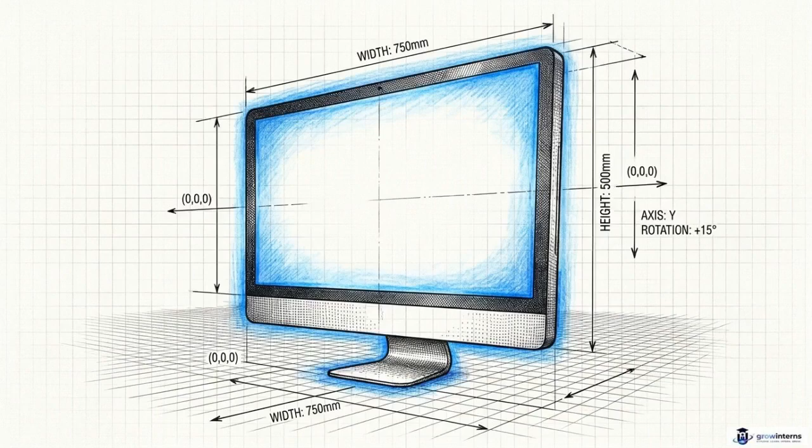When you open AutoCAD for the very first time, you are greeted by an intimidating, infinite, dark void. But as that grid locks into place, you are looking at the digital birthplace for global infrastructure.

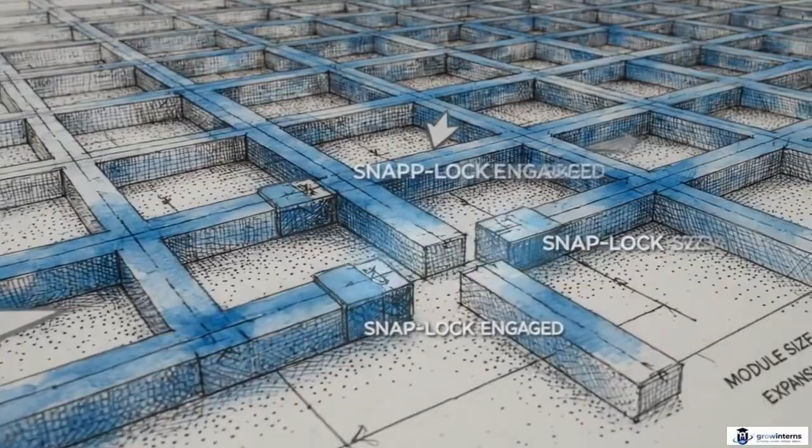Conquering this environment is a rigorous professional requirement. Passing the AutoCAD Certified Professional exam validates your command over this space, a credential utilized by global firms to vet their lead designers. This blank canvas is a strict Cartesian workspace.

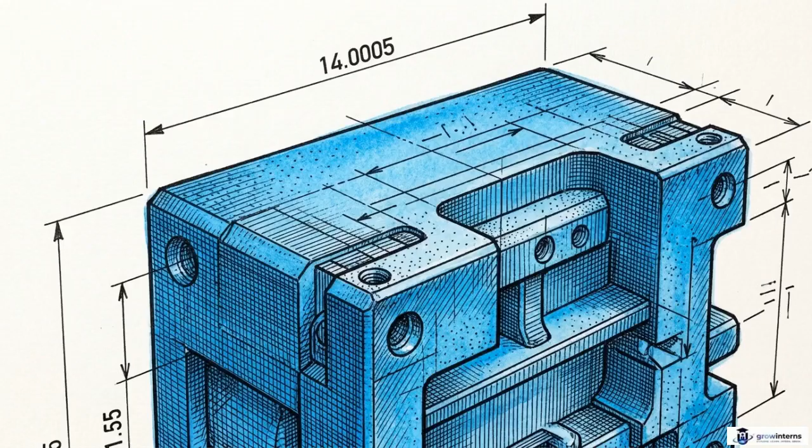Every design, no matter how complex, is anchored by a single origin point, 0,0, with X and Y axes dictating every measurement from there. You have to accept these absolute mathematical boundaries before you can construct a single object in the physical world.

To move quickly, drafters learn to bypass the interface menus entirely. Instead, they speak the software's native language by typing raw text directly into the command line. Tap L on your keyboard and you generate a line. Hit C, and a perfect circle appears on the grid.

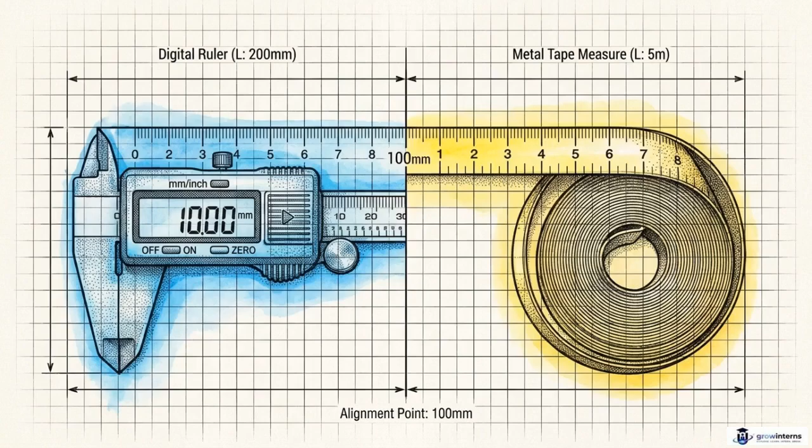Everything built with these commands follows the golden rule of model space: literal 1-to-1 scale. Whether you are drafting a half-inch microchip or a 1,000-foot skyscraper, you draw it at full real-world size.

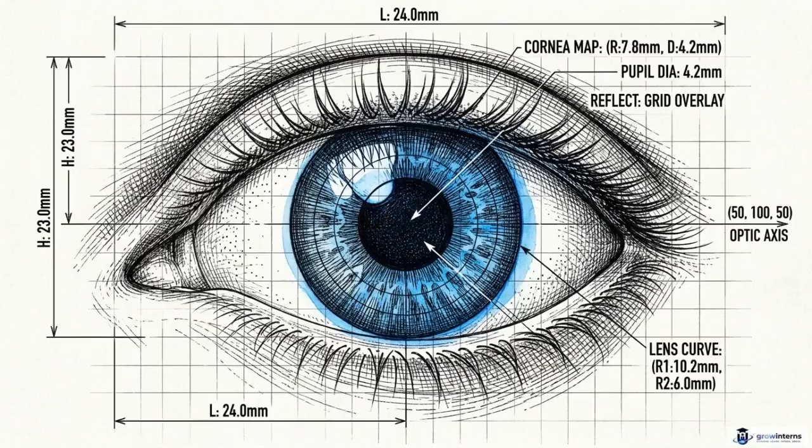Because the workspace is massive, users deploy tools like object snaps and dynamic input to lock their cursor onto precise mathematical coordinates, removing any chance of human error. Once you internalize this command language, you stop drawing by visual estimation. Every line you place becomes a deliberate, calculated coordinate.

In the early weeks of learning the software, a drafter rapidly builds speed. By deploying tools like associative arrays and reusable blocks, a single drawn chair can instantly populate an entire theater layout.

To keep a massive, complex floor plan legible, all this geometry is organized into strict layering systems. Electrical wiring on one layer, structural walls on another. However, no matter how perfectly organized those layers are, the entire design remains trapped on a flat two-dimensional plane.

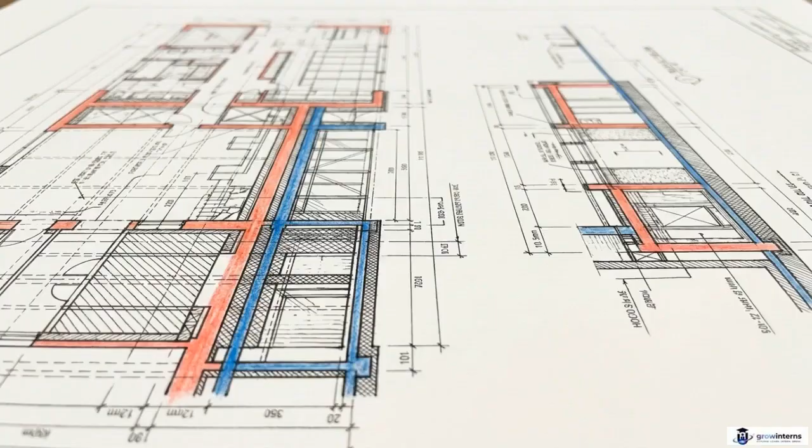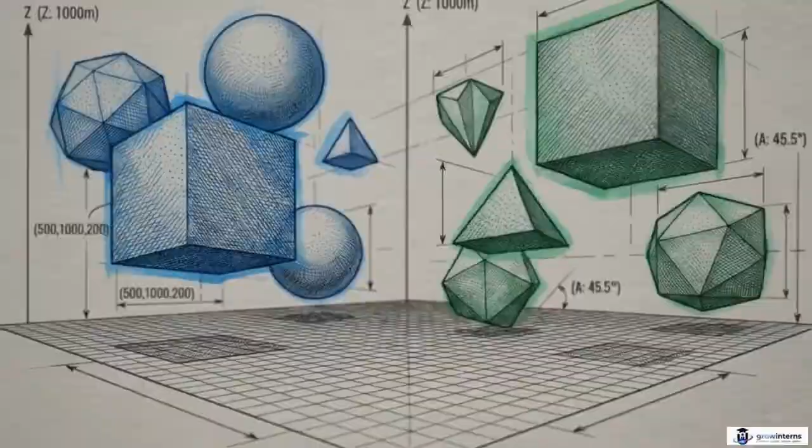Real-world physical objects have volume and mass. To properly engineer them, the designer eventually has to abandon the safety of the flat grid and step forward into the z-axis. Activating the z-axis introduces the view cube, allowing you to orbit your perspective and extrude flat profiles into basic three-dimensional volumes.

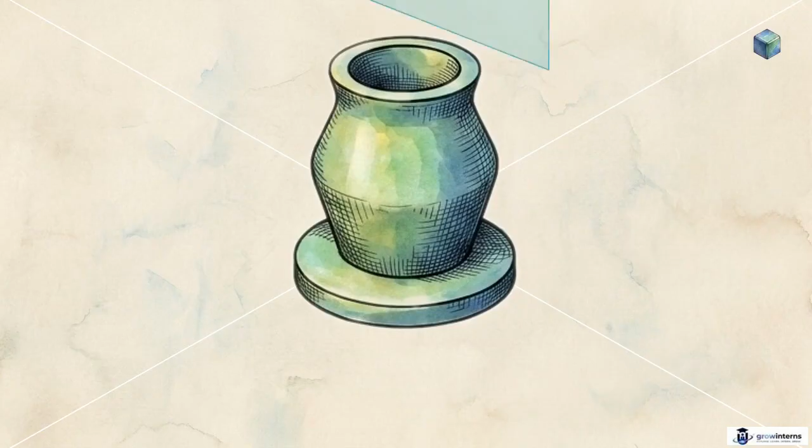First is the loft command. It bridges multiple flat wireframe profiles floating in space to generate a complex organic volume. Then, the slice command cuts that solid geometry into precise halves. Finally, the shell tool hollows out the interior, leaving a uniform wall thickness to create a manufacturable part.

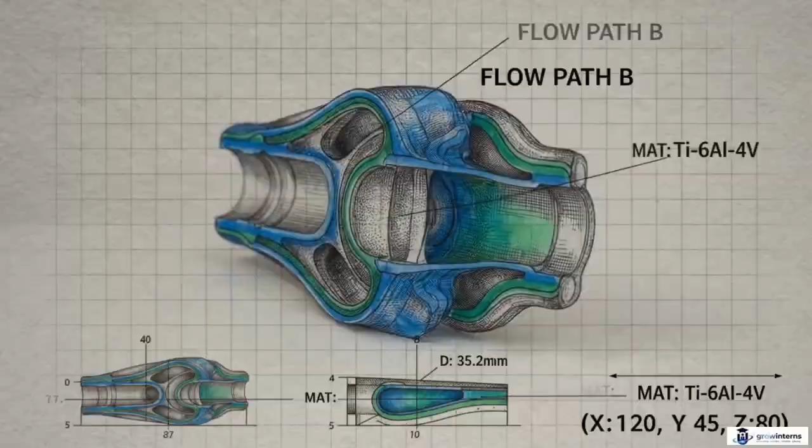Mastering the ability to mold, slice, and carve digital mass is what distinguishes an entry-level drafter from a professional engineer. A pristine digital model floating in a void cannot instruct a crew on how to pour concrete or mill steel.

This is where AutoCAD's dual architecture comes in. You build the model in the infinite environment of model space, but you present it in the finite, printable realm called paper space. Paper space utilizes layouts to generate a scaled viewport window. It takes your infinite one-to-one model and scales it down so it fits safely onto a standardized sheet of paper.

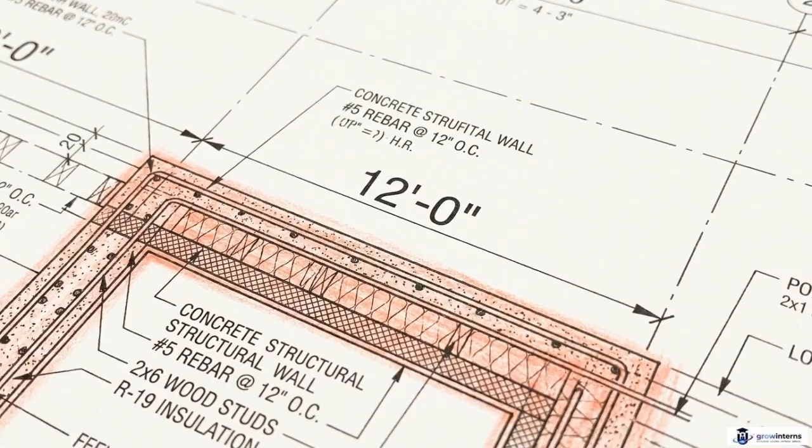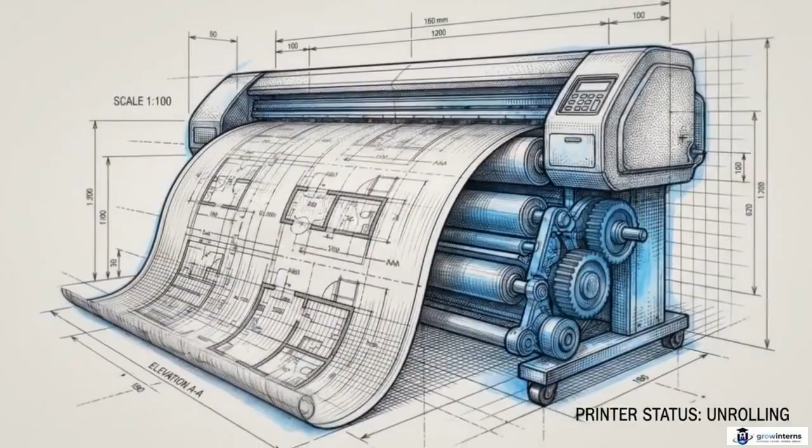To ensure the construction crew can actually read the measurements, we use annotative scaling. This locks your dimensions and text, keeping them perfectly legible regardless of how deeply the viewport is zoomed in. With the layout locked, the plot command takes over, exporting a clean PDF or spooling out a massive physical blueprint from a wide-format printer. Transitioning into paper space is how we tame endless digital geometry and package it into an actionable, real-world document.

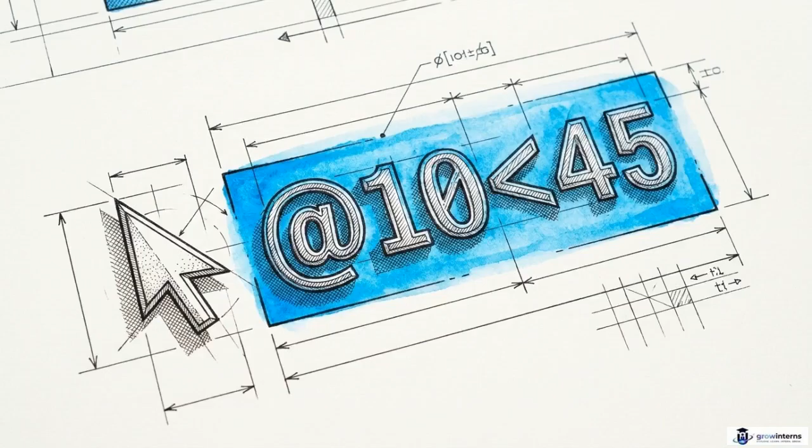The journey from placing a first coordinate on a blank grid to plotting a finished manufacturing blueprint requires a disciplined mastery of the software's internal logic. AutoCAD operates as a deeply structured efficiency engine. You have to internalize its rules, speak its command language, and operate within its strict mathematical environment.

When you do, you gain the ability to pull an idea out of your imagination and translate it into the universal language of physical construction.